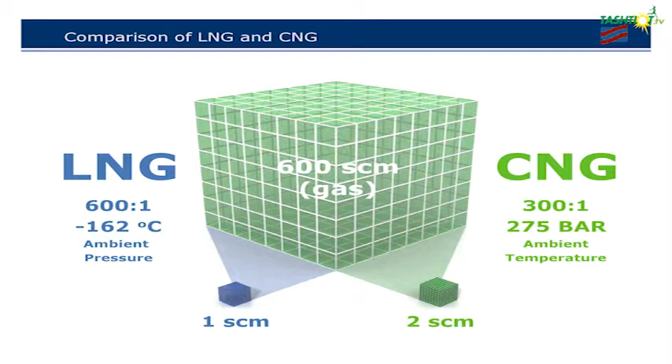Marine CNG, this is where I'd like to have your undivided attention. In order to move large volumes of gas, you have two choices. You freeze it or squeeze it. So what does this mean? LNG is you freeze it. You take the natural gas, you reduce the temperature to minus 162 degrees C, and at that temperature, every 600 units become one. So it's very dense, and it becomes liquid at that temperature.

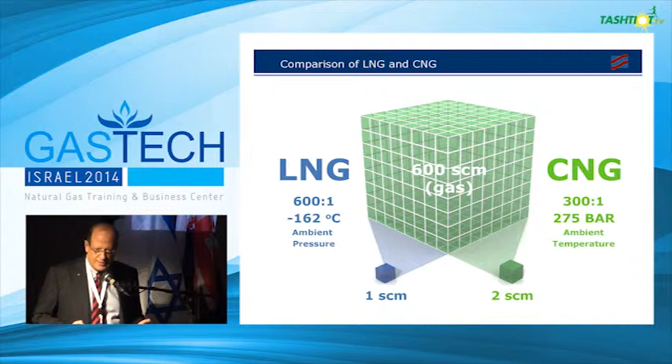Versus CNG, you apply pressure at ambient temperature, and the pressure that we have in our ships is 4,000 pounds per square inch, or 275 bars. And at that pressure, every 300 units become one. So just remember that LNG is twice as dense as CNG. So this is a very important feature. You freeze it or squeeze it in order to have an efficient transportation of large volumes of gas.

So you have an FPSO that the gas comes from the offshore well, and the gas is cleaned and dehydrated, as Jeff mentioned this morning in his presentation, and it goes to a buoy where there's a loading system, the submerged turret loading for deep water. A CNG ship that is empty of gas approaches the buoy, and it connects to the buoy, and you can see that this ship here is already being filled with the CNG.

This is the turret loading system. All these components, by the way, are produced by companies around the world. So these are all proven components. Nothing is bleeding edge. It's leading edge, but it's available. And the full ship departs to the destination while the empty ship continues to fill.

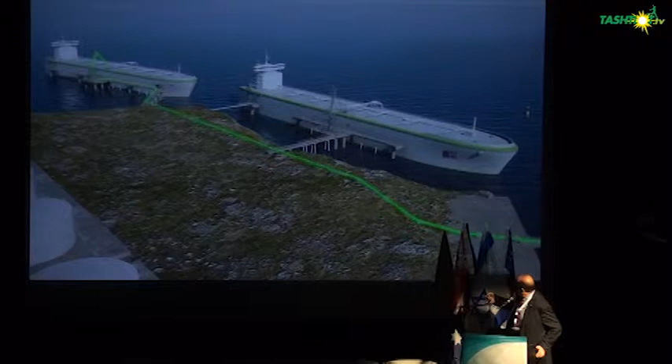At destination, the destination normally is a power plant by shore or a petrochemical facility. There is a ship already there docked, delivering natural gas, and it's almost getting to empty. And another ship arrives, connects with this loading arm. Again, these components are made by manufacturers around the world. And this ship is almost empty. The ship connects in parallel. And then the empty ship departs and continues with the cycle.

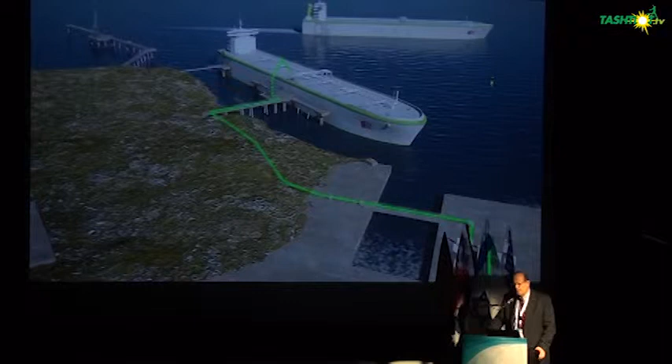The size of the ship and the number of ships in a fleet depend on the volume and the distance. We try to optimize the number of ships in order to achieve the lowest transportation tariff. So this ship continues to deliver, and the cycle repeats itself.

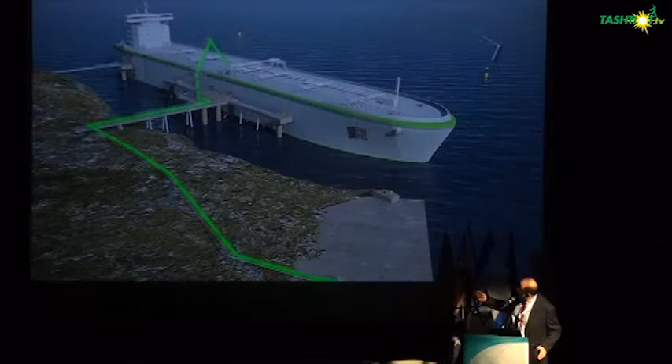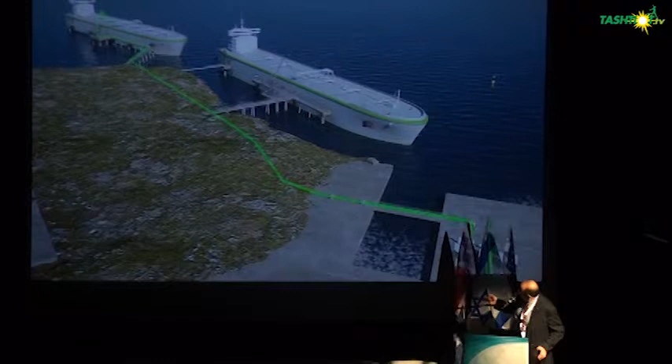Normally, we have one ship arriving at the destination every day or day and a half. These can be also designed with the port authorities, and the delivery could be through a jetty at a port here at the location. It could also be through a buoy. So it's a very flexible arrangement, a very flexible solution. There's no need for storage. The ship is the transporter and is the storage too.

So most of the investment in CNG projects happens to be in the ships. And you can notice that this power plant used to be operating on liquid fuel. So the liquid fuel, when you have combined cycle gas turbines, could be used as a backup, and we work with the utilities to determine what degree of reliability, what redundancy of having two ships at the location at the same time. Okay, so you have a picture now of shuttle operation, how it works.

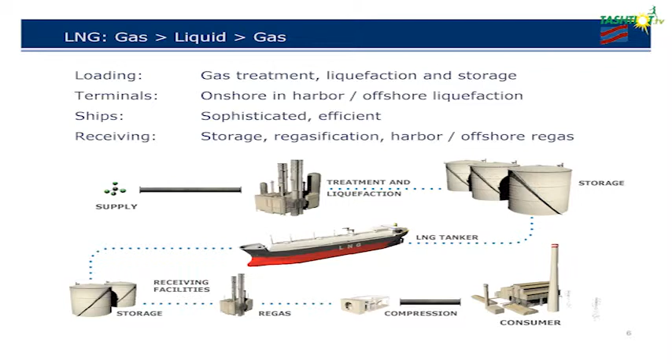And let me just very quickly go over what's the difference between LNG and CNG. In LNG, you get the supply of gas, and normally it comes through a pipeline, but it's clean and treated natural gas, and it goes through, this is the treatment facility, and then you liquefy the gas. It goes into very large tanks that hold quite a bit of LNG, and then comes a very large LNG ship. It takes a huge volume of gas, sometimes maybe 20, 30, 40 times what a CNG ship takes. And then it departs to go to a destination.

It empties its load into another tank, and these tanks could last 20 days, 30 days of the needs of a power facility. Depending on the demand from the power facility, when gas is needed, it goes through a regasification facility, and that basically vaporizes the LNG into gas, and then there's a compressor that brings the pressure of the gas to the pipeline pressure. So if the pipeline is delivering gas at 600 psi, at 70 bars or something like that, this compressor will take the gas to this pressure.

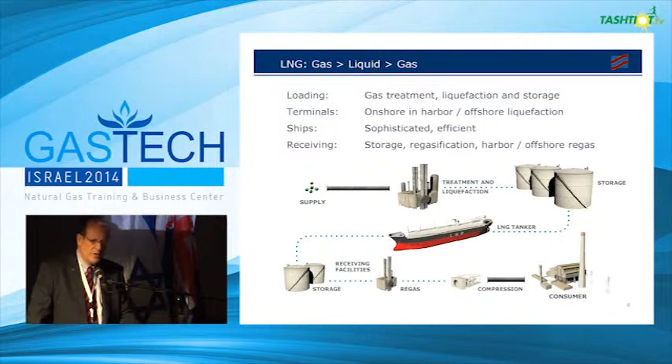So this is LNG, and it uses quite a bit of energy. However, the shipping, because it's a very large ship, and also because liquid natural gas is dense, has a global reach. So we say that LNG has global reach, CNG has regional reach. And the economic distance of CNG is about 2,500 kilometers. So mostly you can reach from Israel most locations in the Mediterranean.

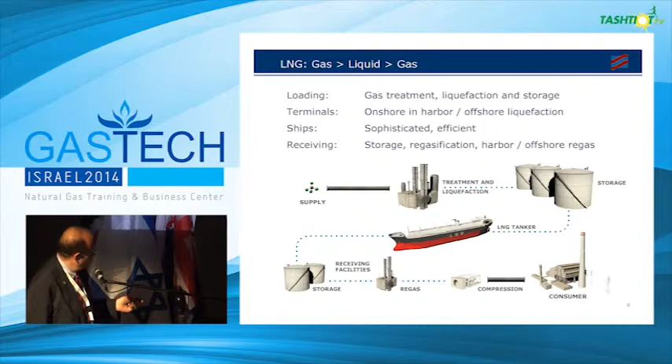In CNG, it's really simple. If you're getting the same gas through a pipeline, you have dehydration and then compression, and you put it on the ship, and the gas always stays as a gas. It does not change form. It gets to the destination, as we have seen in the animation, and it delivers the gas to the power plant.

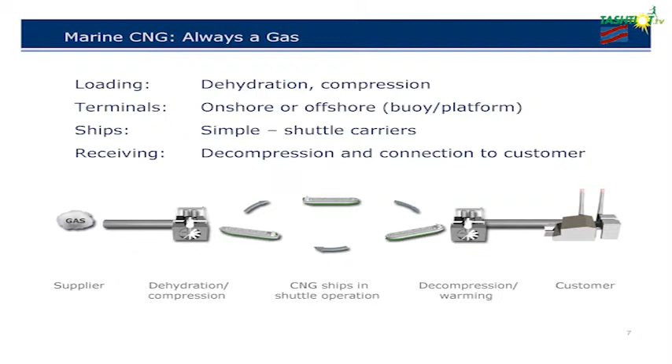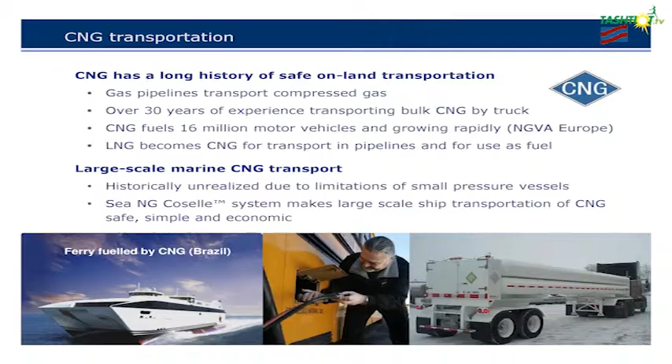There are many applications for CNG. For example, I wanted to mention here that there are 16 million vehicles around the world that run on CNG. I got a question from one of the reporters this morning, just before the break, mentioning concerns about the pressure. And 4,000 psi is a high pressure, but I was mentioning that some professional divers in the U.S. have on their back 4,200 psi, 4,200 pounds per square inch. And CNG is very safe.

Your neighbors in Athens, for example, the buses run on compressed natural gas. Your neighbors in Cairo have more than 100,000 vehicles running on compressed natural gas. Many places in Southeast Asia, if you have traveled that part of the world where they have the tuk-tuks, they used to emit a lot of fumes, now they run on compressed natural gas. And with heavy traffic and accidents, you don't hear about concerns about compressed natural gas safety. Even in bad collisions, the tank always maintains its integrity.

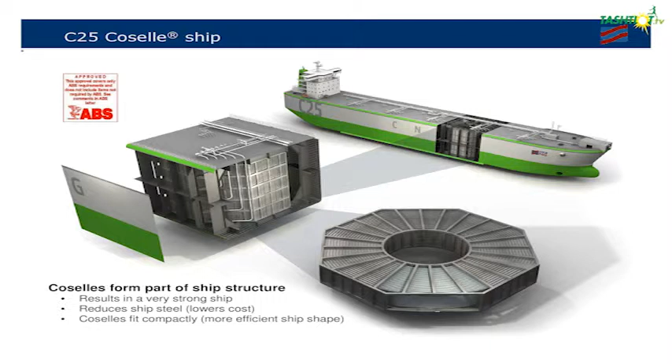Ships running on CNG as a fuel. And that's the ship that we have designed and got approval for construction from the American Bureau of Shipping to build, and which I will spend some time on. What I wanted to make sure is that everybody's comfortable with CNG. CNG has been around for more than 100 years. Every pipeline is a form of compressed natural gas.

And even our proprietary technology, which is this tank, we call it the Coselle. Coselle is not an English word. It's a word that's made from coil and carousel. And this tank is built with a 6-inch pipe. And the pipe is about 6 millimeters in thickness, or 1/4 of an inch in thickness. Very rugged, produced by more than 150 mills around the world.

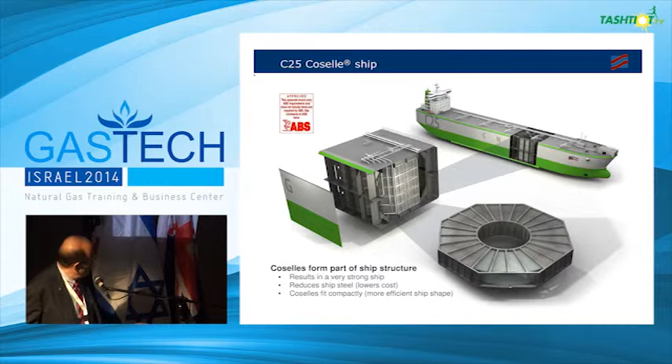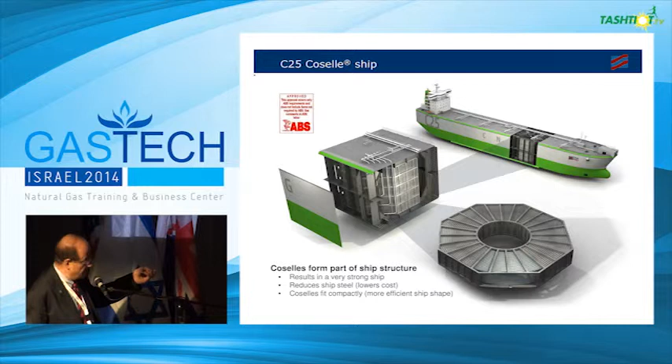Each of these tanks is very large. It holds something like 4 million standard cubic feet. It has 21 kilometers of pipe. And this is what has been approved for construction. And each ship has a number of these modular tanks. So the tank is the same tank, and the size of the ship is determined by how many of these tanks are on a ship. So for example, this is a C-25, it has 25 of these units.

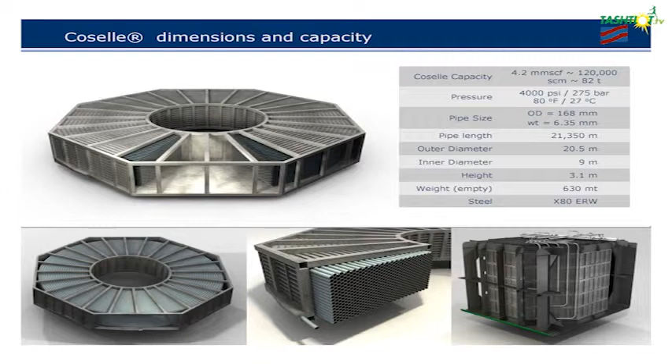This is a little bit of specifications of the tank, the size, the weight. It weighs 630 tons, and then when you fill it with gas, you add another 82 tons. A very rugged system. And there are other CNG solutions that are built in bottles. The problem is the larger the bottle, the thicker the wall you need. And when you go to very thick walls, you need very specialized metal, only produced by maybe 4 or 5 mills around the world. Our pipe is produced by many mills around the world, so it's easy, it's low cost.

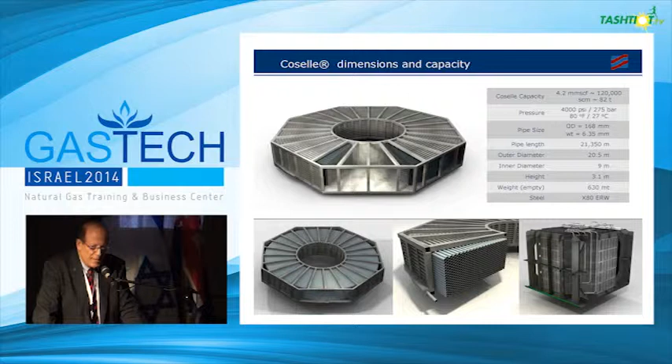And in the event, and it's very, very remote, like 1 in a billion probability that there would be a rupture. In the event of that, it's like when you have a leak in your tire. It doesn't explode. The gas has to travel a long distance. The gas is choked. So it's a very safe and rugged solution.

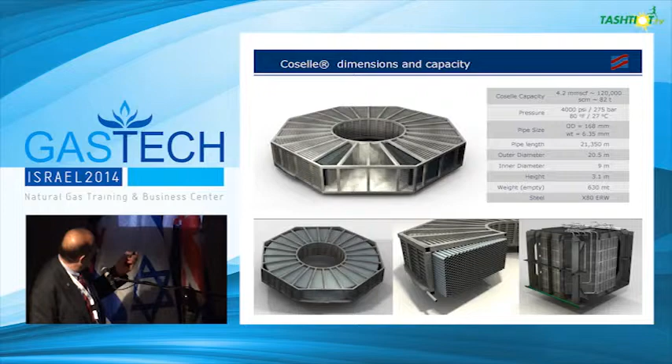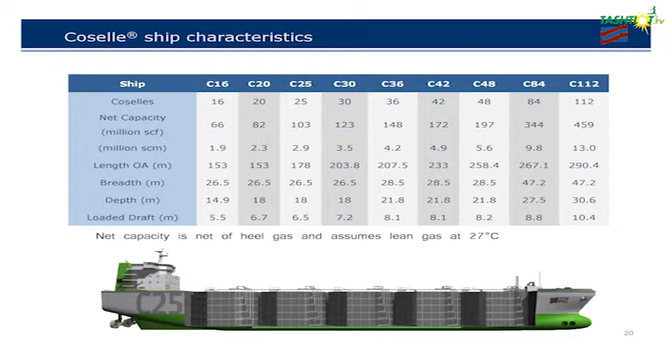And you can stage the project. You can start the project with 1 ship. You can add a second, third, fourth. So you don't have to spend all your money up front. You can stage the project as your demand grows and as your comfort level also increases.

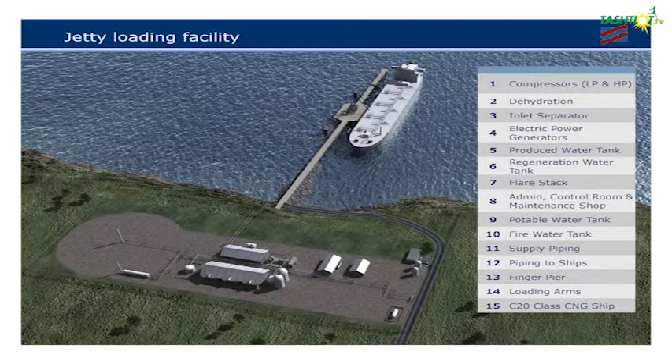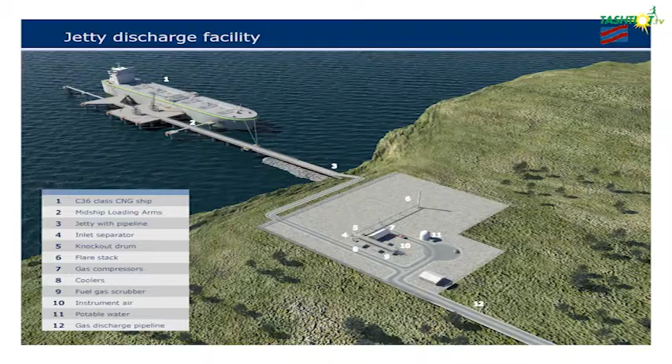In terms of loading, this is a simple jetty, and the intent of this picture is you can see how simple the loading facility is. If you compare that with an LNG facility, you can see the simplicity in the solution. Again, if you go to a discharge facility, it's even simpler. It's much simpler, and it takes a very small footprint; sometimes you don't have the space in Israel, and that makes it a much simpler solution.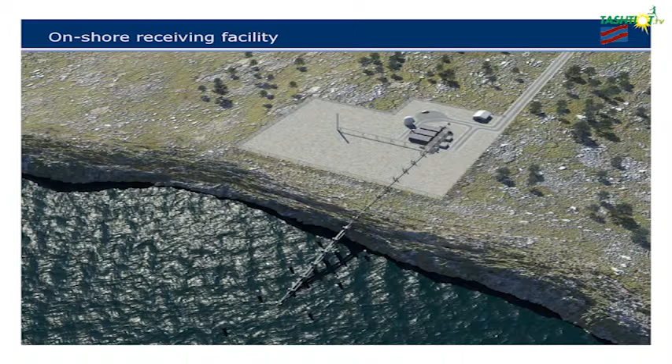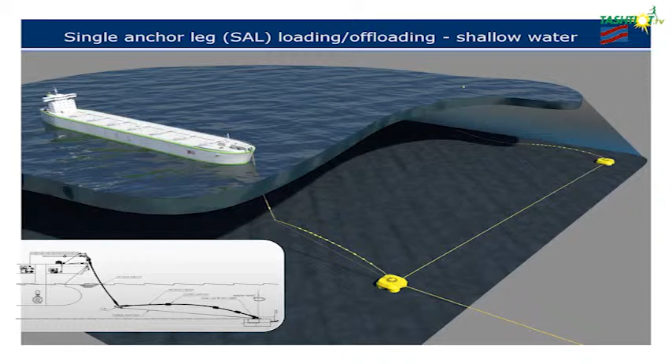This is a solution where the ships are offloading on a buoy. It could be any distance from shore, and the natural gas comes through a pipeline, and then it's delivered to the facility, the power plant or the petrochemical facility. There are a number of other applications for loading or offloading. This is the single anchor leg loading and offloading. There is the submerged turret loading, which we have seen in the animation.

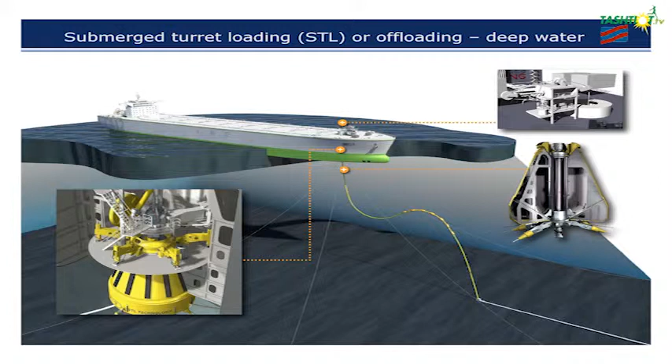Now I will go to safety. In order to have a ship approved for construction, you have to go through very, very rigorous approval. Approval for construction is different from approval in concept. It's more than 400 drawings that engineers in the American Bureau of Shipping or DNV would have to look at before they stamp every drawing and say this is approved and it's safe. Because if you don't have approval from the marine authorities, no port master will want the ship to enter their port. They will see it as a hazard.

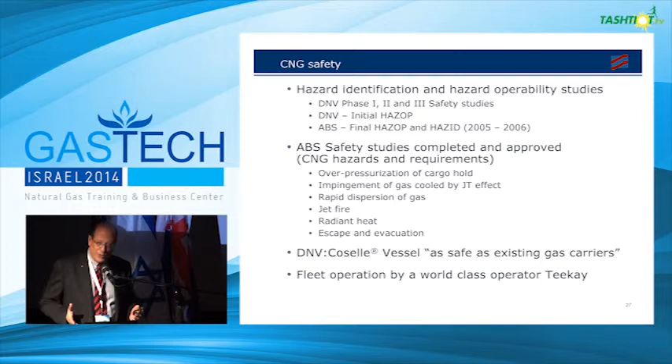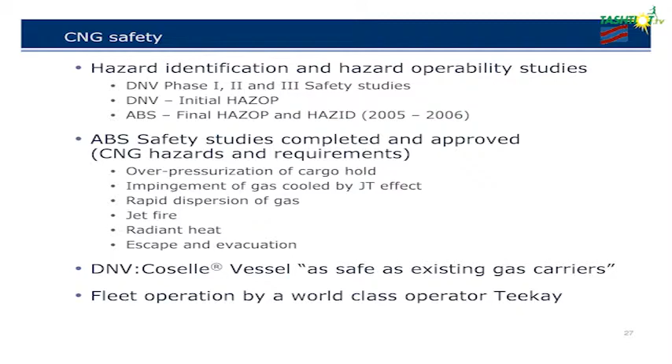I'm not going to go over all these studies, but volumes and volumes of studies and testing have gone on through 14 years to get to the point where we have CNG available for marine transportation. And I also want to mention that you need to go through this approval even though CNG is very simple. When you ask the engineers who know about LNG and about oil, on a scale of 1 to 10, if LNG is 10 in terms of complexity, CNG is 1 or 2. Because it's really a pipeline that is coiled. And then you have a bunch of valves and control systems that are available in the industry.

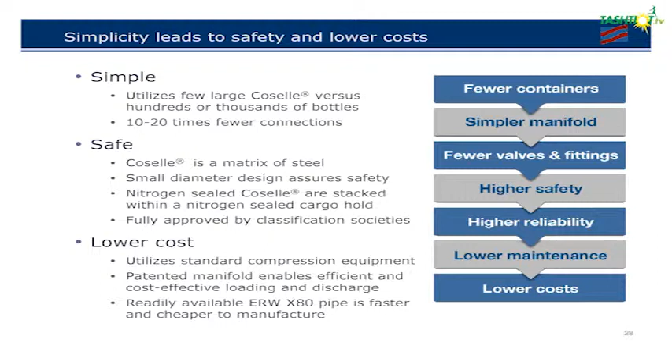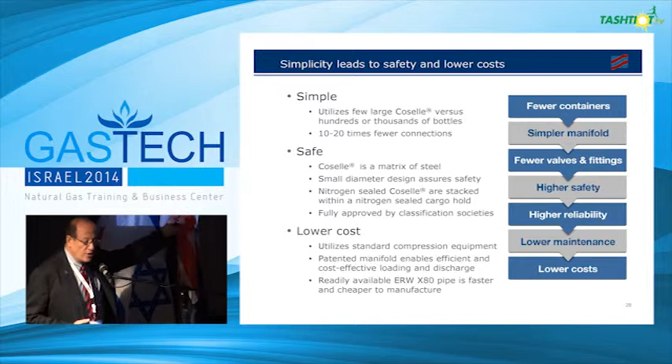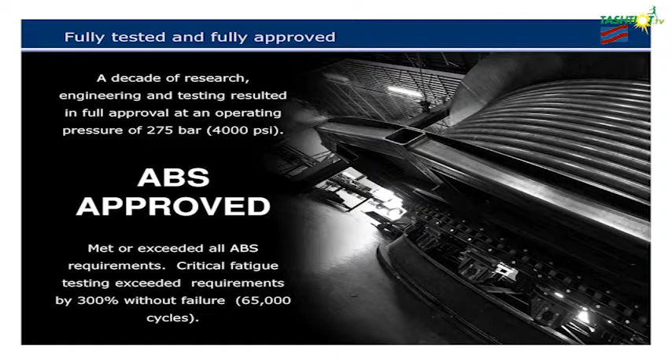The testing of the tank went 65,000 cycles with no failure. A cycle means a trip, like going to destination and coming back. In terms of real time, 65,000 cycles represents 1,000 years of our operations. Now, all the projects that we're looking at are anywhere between 5 and 25 years.

But this is the kind of testing that you need. It's like if you're building an aircraft, the wing would need to be tested to the same standard because you can't have a wing fall off the plane in flight or something like this. Because once the tank is built, it goes in the ship. It's not going to fail.

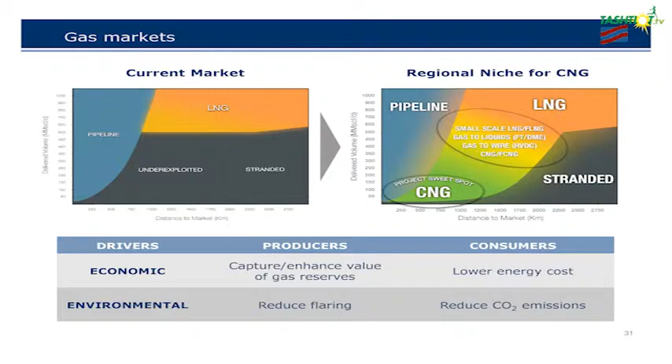So let's talk about the niche market, because as much as sometimes people say it's competition between CNG and LNG, I see it as complementary. It's a niche. If you have gas, you need to look at all solutions that are available in order to maximize your netback. Netback is the money that you keep in your pocket after what you get at the destination, less the costs that are involved to get the gas to market.

So in this chart here, I know you might not be able to see it, this is the volume, and this is the distance. And before there was CNG, this would be the region, the most economic region under normal conditions for pipeline. And this was LNG. Under 500 million cubic feet, LNG is not practical.

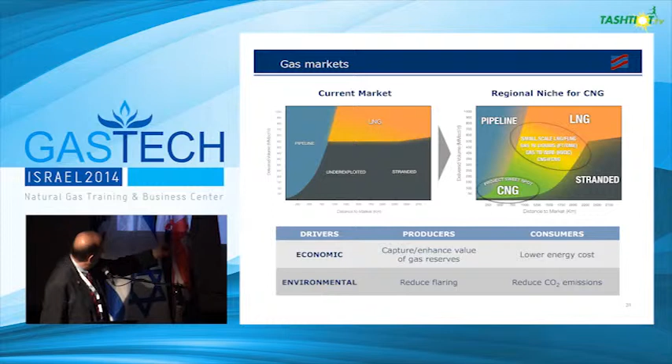It becomes too expensive. And so if you are a company like Noble or Delek and you found gas, let's say here at this distance and this volume, it's nice that you found the gas, but it's stranded. It's too expensive to build a pipeline to shore, and it's not enough to build an LNG facility. The chart here on the right is the area that CNG opened. So what used to be considered stranded now can be developed.

And that makes it very interesting because when you're looking for gas, you're lucky here in Israel that you found Tamar, 10 or 11 TCF. Leviathan is 20 TCF. These kinds of finds are world class. You don't find that kind of volume every day. What you normally find is a half TCF, 1 TCF, 1.5 TCF.

Sometimes when you find the large volumes, it sounds like the small volumes are not big enough. But these small volumes can be developed and can produce a lot of value for the producers and a lot of value for the market. As I mentioned earlier, the economic distance of CNG is 2,500 kilometers. So you need to have a gas source and a market within that distance.

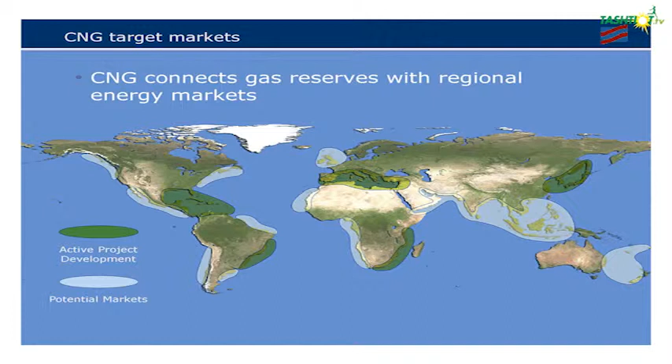The light blue areas represent the locations in the world where there is the potential of using CNG. The green areas represent the areas in the world where we have active projects under development. And you can see that the whole Med is very interesting.

You have a lot of gas in North Africa, and now in Israel, Lebanon is talking about gas, Cyprus, and even Greece is looking for gas, and they have some minimal amounts. But you have proximity between the source of gas and the market. It's within that economic distance. And I'll tell you in a little bit why that is important.

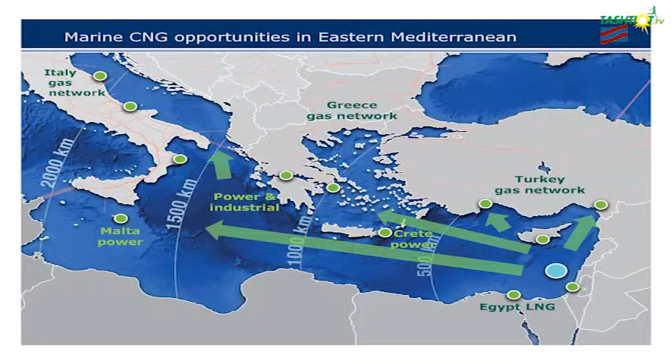This is a map that shows the source of gas in Israel and the potential market that exists. And you have the circles of distance. So, within 2,000 kilometers, you can even reach Malta. You can reach Sicily, Italy. Many places in Italy, even one place in Italy that we're working with, have converted a port to receive CNG.

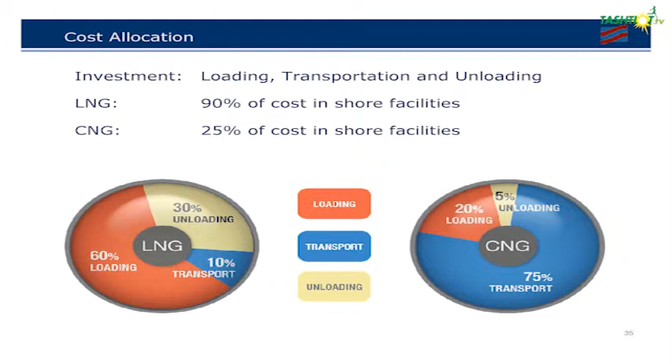So this is a very important part for the producer: why CNG, why you should be considering CNG. In LNG, large investments, billions of dollars. 60% of the investment goes into the LNG liquefaction facility, or we call it loading for comparison purposes here. 30% into the regasification or receiving facility, and only 10% in the shipping. Remember, I mentioned very big ships, very dense LNG. So the cost of transportation of LNG is lower than CNG.

Versus CNG here, you have 75% of the cost in transportation, in the ships, and 20% in the loading, which is normally a compression plant, and only 5% in the receiving facility, which normally is a very small plant to control temperature and pressure.

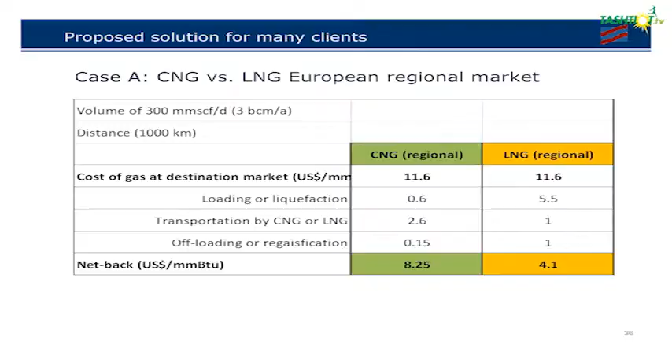This is a slide I want to show you. This is very important for producers. The case is LNG, for example. These figures up here are from July of last year. I took the average cost of natural gas delivered in Europe in July of last year, $11.6 per million BTU, and subtracted from it the cost. For example, I'll start with CNG: the loading or liquefaction is $0.6 per million BTU, the transportation is 2.6, and the receiving facility is 0.15. This is for 300 million cubic foot, 1,000 kilometers. So the net that you get as a producer is $8.25.

Versus if you made LNG here in Israel and wanted to sell it to Europe, the netbacks are shrunk to $4.1 per million BTU. And again, I'm not debating whether it's 550 or 750 or 475. You need to look at the magnitude. In terms of regional opportunities, you can achieve higher netbacks in CNG than LNG.

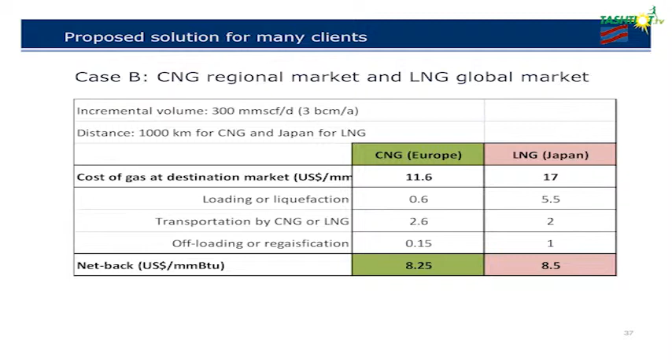Now, when we go to global, that's my next slide. I took the average cost of natural gas in Japan last July, $17 per million BTU. All producers look to Japan and Southeast Asia, where you have the highest price of natural gas, and that's where you want to reach. Now, CNG cannot reach Japan from the Eastern Med. This is outside of the 2,500 kilometer distance, but it is within the LNG range, of course. LNG is global. But if you look, the netbacks are close.

So what that tells us is that there's a huge opportunity for Israel to export gas into the region. You have Cyprus looking for gas for 10 years until they get their own. You have Turkey, a huge market looking for natural gas. You have Greece, you have Italy. Even Egypt used to be an exporter, now they're looking for gas. It's a tremendous opportunity to build links, achieve higher netbacks and get the value for the natural gas that you have here.

So in conclusion, I want to say that CNG is simple, safe, reliable, and flexible. It takes advantage of the lower cost of regional gas. The gas here, for example, the Israeli electricity company gets gas at $5.8 or $6 per million BTU. If you use that as a base for the market in the Eastern Med, it's good value after you add the transportation.